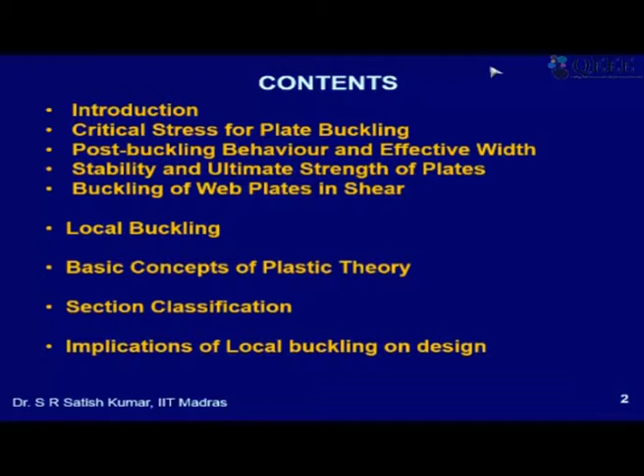This is a little advanced, but we just need to understand the concept of what plate buckling is. We don't need to go into the mathematics of it.

What I'm going to show is a plate subjected to uniform compression of nx per unit width. The width of the plate is B, and the depth or length of the plate is A. We've marked the x and y axis. The x axis is along the length, the y axis is along the width, and the z axis is out of the plane of the plate.

We are only pressing the plate, and as a consequence the plate is going to buckle out of its plane, so the deformations will be in the z direction. This plate is assumed to be simply supported along all four edges, meaning those edges cannot move out of their position, but they will allow rotation like a normal hinge in a beam. So it's only a two-dimensional concept, something like a beam.

We are now going to apply this axial load in the plate, which we call an in-plane load when it comes to a plate. As a consequence, as I go on increasing the axial load, the middle strip, strip AB, will start buckling, and basically the strip will try to come out of the plane of the plate.

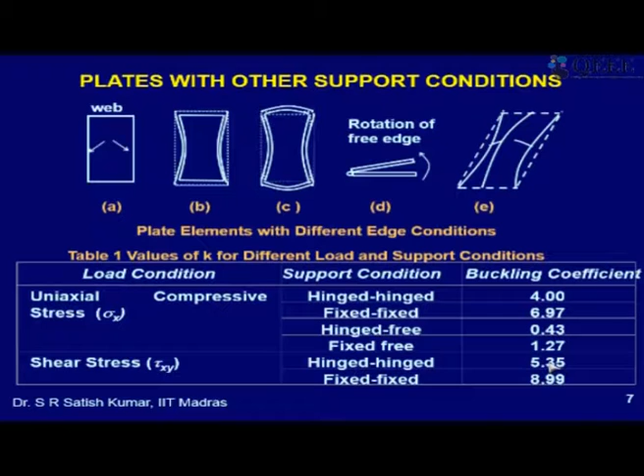Similar analysis can be done for shear buckling of plate also. These are the shear buckling coefficients. We'll see how shear buckling looks later on, but let's proceed and see what is the consequence of this plate buckling now.

In the design of plate elements, because most cross sections are made up of plated elements, we have something called the limiting width to thickness ratio. We don't want the plate to buckle within the elastic limit. As I compress, we want the plate to reach the yield stress first, and then once it reaches yield stress, if it buckles, that's okay. So we don't want elastic buckling of the plate.

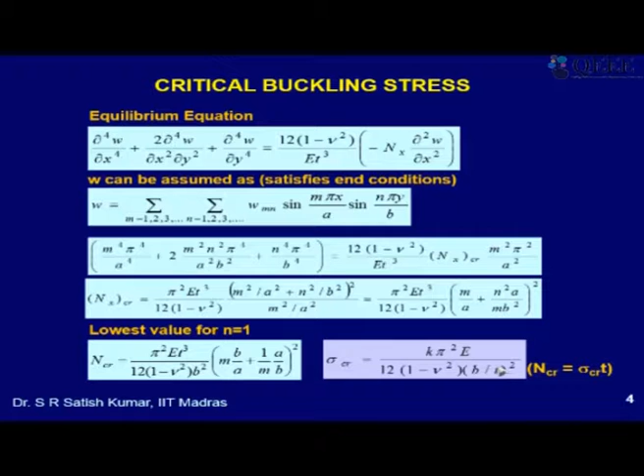So what we are doing is equating the buckling stress we got, F critical, and saying that this should be greater than or equal to Fy. That means if it is equal, we get the largest B by T that we can allow. These are the limiting B by T ratios which we calculate by equating F critical to Fy, and then Fy comes into picture.

We get the limiting B by T value as the square root of K pi squared E divided by 12 into 1 minus nu squared Fy. For any grade of steel, Young's modulus and Poisson's ratio are generally constant, so we can substitute these numbers, and pi squared is also constant. For a given support condition, say hinged, if I take K as 4, this entire thing becomes a constant, so I can write this as C by root Fy. Many codes prescribe the B by T limiting values as C by root Fy.

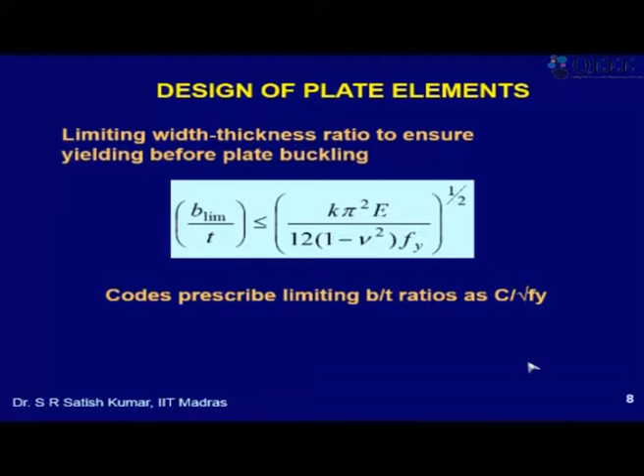What our code is doing is substituting Fy also as 250, so this entire thing becomes a number: C divided by root of 250, whatever that number is. It gives you directly that number and says use this for your steel plates. If your plate is made of some other strength of steel, you have a correction factor called epsilon, which we can use to correct this limiting value. That is as far as the buckling stress is concerned.

Now, as I said, the plate buckling is stable. So even though the plate has buckled, it can continue to take additional load.

So now we are actually interested to know what is the load, or what is the stress, at which this plate will eventually fail. Fail in the sense it can't take any further load and it starts buckling in an unstable manner.

This was first studied by Von Karman, and he realized that as the middle strip buckles, this stress is the F critical. So it will not take any further stress, and as a consequence, only the middle strip has buckled, but the edge strips, the strips next to it, are still able to take load.

These two are my longitudinal edges and they are hinged. So they will not allow out of plane deformation, but they will allow in plane deformation. So as I go on increasing the stress until the edge stresses become equal to the yield stress, this plate can continue to take further load.

At that point my stress distribution is nonlinear, so it is difficult to calculate what would be the total load taken by the plate. So what Von Karman said was you can convert this nonlinear stress distribution into two equal rectangular distributions such that the area of these two is the same as the area under the total curve.

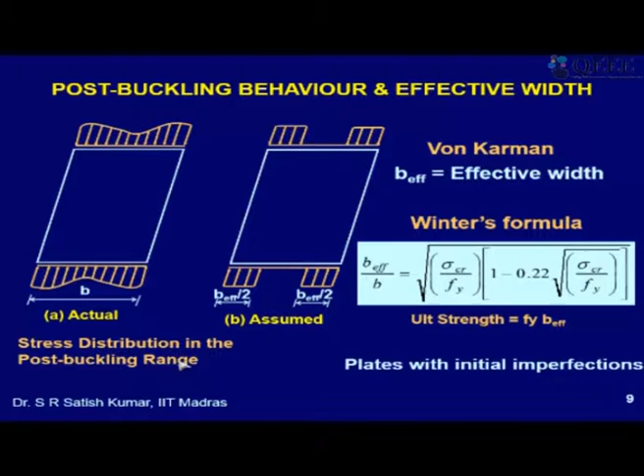But for hot rolled sections, we will limit ourselves to the buckling stress; we will not go for the post buckling stress. So now it helps us to understand plate buckling better if we compare it with column buckling. Let's look at how a column buckles.

We saw that an ideal column will go on taking axial load until P critical is reached, the Euler's critical load, and then suddenly it will buckle. So it will have a secondary path which is horizontal, an unstable buckling of a perfect ideal column.

But practical columns do have some imperfections, so they start buckling from the beginning, but they don't lose their stiffness so quickly. As I approach the critical buckling load, they lose their stiffness and go asymptotic to this curve. These are actual buckling curves for practical columns.

If you look at a plate, something similar happens for an ideal plate. It goes up until you reach F critical, but then instead of buckling suddenly, it continues to take further load, meaning it does have a positive stiffness. Of course the out of plane deformation will increase more and more, but in practical plates, you start with an initial imperfection and then it goes like this.

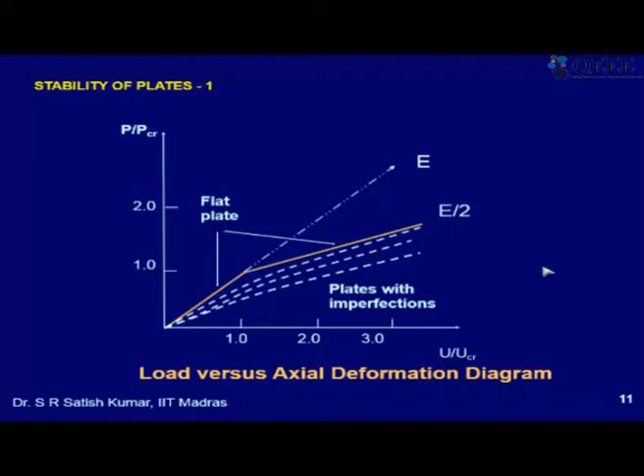So you don't have a well-defined buckling strength point, but the slope remains fairly steep, more or less. That is more important for us, so that is also used in design. Most of the plates which are very slender are used for design. This slide just gives us the stiffness values for a plate.

If you look at the test results for columns, we saw that Euler's curve plots like pi square E by L by R bracket square versus the slenderness ratio, and then F equal to Fy is the critical limiting value. Together they represent the column strength curve, and all the test results fall below that. Yesterday we saw that we use 4 column strength curves A, B, C, D depending on the type of column we are looking at.

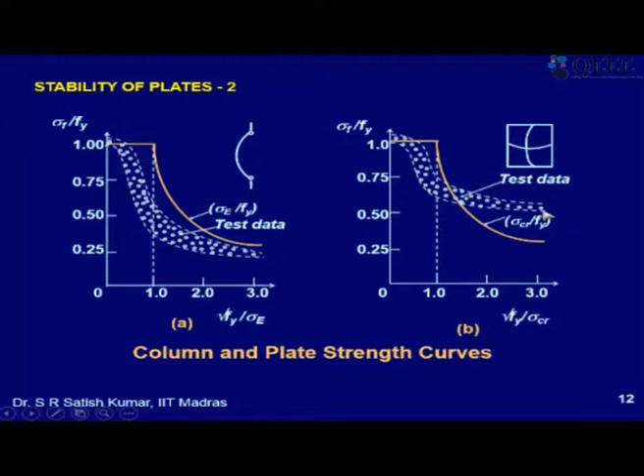In case of plates, the test results plot somewhat like this: as the plates become more and more slender, you get larger and larger post buckling strength. So this is my theoretical buckling stress value, but practical plates can have something called extra strength beyond the buckling, that is post buckling strength. Winter enables us to calculate that strength.

Now let's look at what happens when I take a plate and subject it to shear force, in plane shear. If I try to shear like this, normally the plate may rotate, so there has to be a complementary shear, otherwise the plate will rotate. For equilibrium you need to have complementary shear, and I am applying the shear V by the cross sectional area, which will be my tau critical.

As I apply this, if I plot it like a Mohr's circle for the principal stresses, I'll realize these two have a component along this diagonal, so they will compress this diagonal, whereas the other two have a tensile force in the other diagonal. Depending on the shape or aspect ratio of the plate, one diagonal will go in tension, the other in compression, and I go on increasing this tau critical.

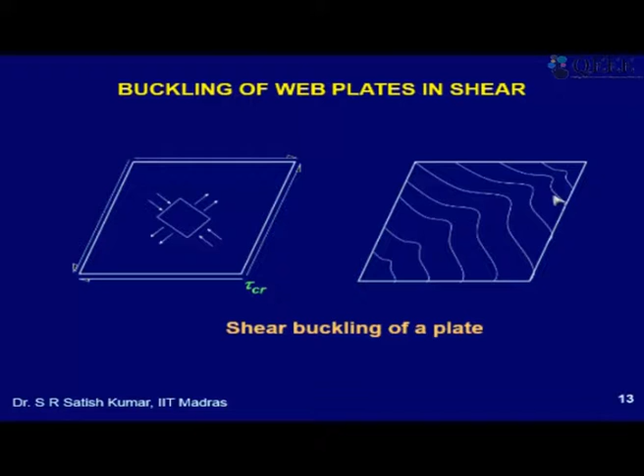What will happen is the diagonal in compression will buckle, as if the plate is oriented at 45 degrees, and this diagonal will buckle while the tensile diagonal continues to carry further load. So even shear buckling is stable, and we know the shear buckling coefficient for a plate, which is how we use this in design of plate girder webs. This is called tension field action, which adds up to the shear buckling strength.

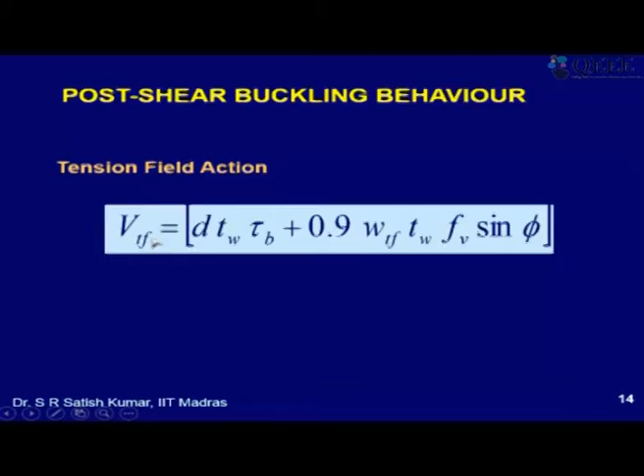The theoretical value of shear buckling stress is tau critical, but the practical value for imperfect plates is tau b. The code gives you how to calculate tau b from tau critical. So this would have been the buckling stress, but in addition to that we have another expression which adds the post buckling strength. Together they represent the total load at which the plate will fail in shear. That is just an introduction to plate buckling; we are not going to go deep into that.

Now we'll proceed to how plate buckling affects our routine design. We have to look into what is called local buckling, and how that affects design, and to tackle that we have developed a method called section classification.

We know that most of the steel sections we use are not like single plates, but are actually made up of plates. For example, an I section is made up of 3 plates, a box section is made up of 4 plates, and so on. But what is important from the plate buckling theory point of view is the end conditions.

This plate, even though physically a single plate, can be looked at as made up of 2 plates. Both plates actually have a hinge condition at the web, and one edge free. So one edge is hinged, one edge is free — these are called outstands. The I section has 1, 2, 3, 4 outstanding elements and one internal element which has both edges hinged.

As I compress this I-section, what is likely to happen depends on the B by T or D by T ratio of the plate. For the flange width to thickness ratio, I should use buckling coefficient K as 0.43, and for buckling of the web, I should use K as 4.

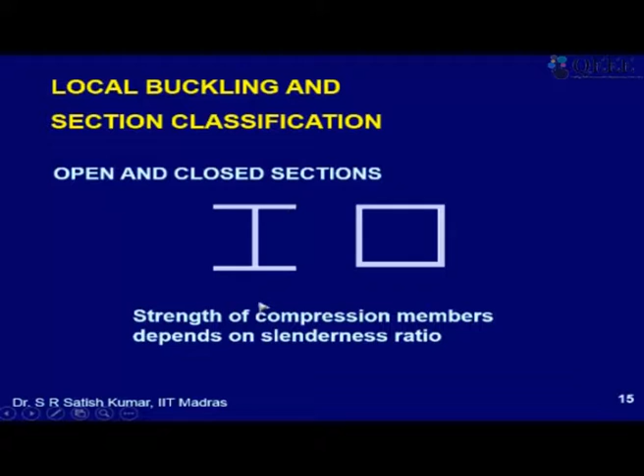This is called local buckling. Basically local buckling gives distortion of the cross section, but the axis of the member remains straight. If the axis bends, that's called global buckling. Here we are saying the axis is straight, the member has not buckled as a whole, but only the component plates have buckled. This is called local buckling.

We don't want this to happen in real columns. Even though local buckling is stable, we don't want this happening in hot rolled columns. So we have to calculate - either we limit the B by T values, saying the flange B by T value cannot go beyond a certain value, or we allow it and ask the designer to make sure at what load it will buckle, and what will be the consequence of that buckling on design. Either way can be done.

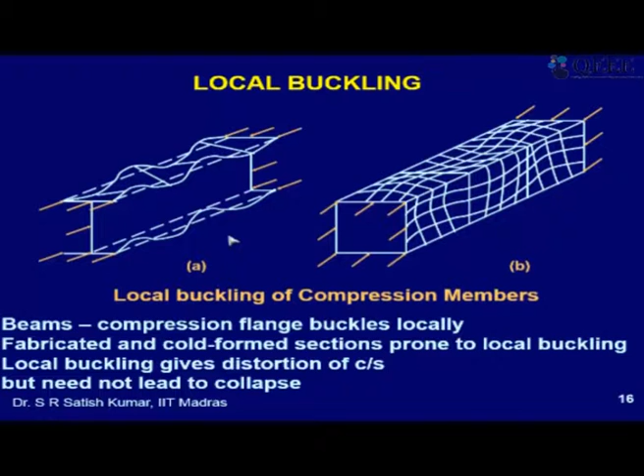So what we are saying is we need to be aware of local buckling, and then we need to be able to take it into account in the design of compression members and members under bending. So the first thing we'll do is what is called section classification.

Before we go for that, let's look at some basic concepts of plastic analysis. As I was telling you yesterday, in limit state design, elastic analysis assumes the first yield anywhere in the beam as the collapse point, and doesn't go beyond that. Whereas plastic analysis helps you analyze the progressive failure of the beam until it collapses, and gives you the correct collapse load, so you know exactly what factor of safety you have.

Let's take a fixed beam - it's an indeterminate structure. We apply a UDL W per meter run, shown as a thick line here, and go on increasing the uniformly distributed load. Initially my bending moment diagram will be like this - hogging at the supports, and sagging at the midspan. As I go on increasing this, at this cross section, the bending moment will reach the first yield moment My, and it will start yielding.

Plastification across the cross section will occur as shown here. So this stress will reach Fy, and then it cannot take any further stress, so it will remain at Fy, whereas the inner fibers will start reaching yield until the entire cross section has reached yield stress, plus or minus. So that is yielding in compression and yielding in tension. In that situation the beam can take a moment called MP, the full plastic moment or the plastic moment of the cross section. It will reach that, and after this it cannot take any further bending moment because it has reached its full plastic moment.

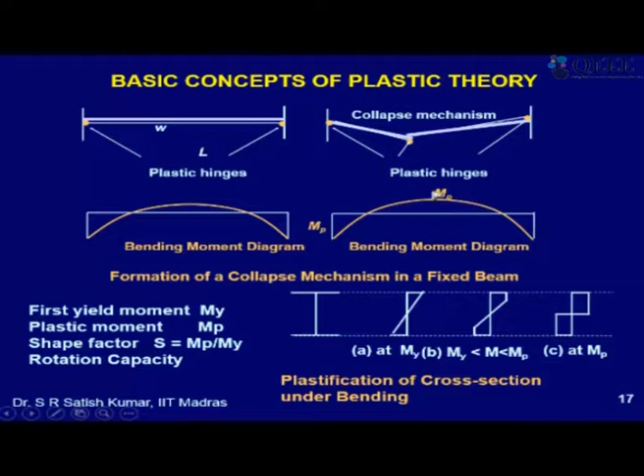So again, plastic analysis is not valid. Such sections are called compact sections, and they do reach MP, but they don't maintain MP for larger rotations. If I further increase the B/T, there will be sections which cross My, reach first yield, but can't even reach MP. So you can only do elastic analysis. Your pure bending theory, like M/I equal to F/Y, can be used to calculate My, and after that we don't know whether it will buckle here or here.

It is not possible to calculate, so conservatively we will take the capacity as My, and then it will come down. As I further go beyond that B/T limit, which I told you in one of the slides, the section may buckle even in the elastic limit. That is, even before the stress reaches Fy, the section will buckle, which means even our normal pure bending theory is not applicable for such sections, unless we calculate the effective width and take only that part as effective. These are called slender sections.

So the code says you are not allowed to use slender sections because your analysis is not valid for that. But you can use semi-compact sections in bending, so you will reach My. You take the capacity of semi-compact sections as My, and for compact and plastic you can take the capacity as MP, but you can't do a plastic analysis. You can do an elastic analysis and use a compact section, but you can't do a plastic analysis unless the section is plastic. This is called section classification.

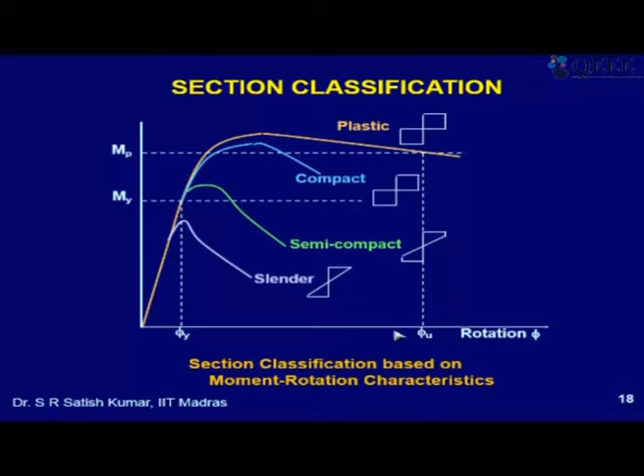Now of course we can't always sit and draw the moment rotation curve for practical sections. So what is the easier way to classify sections? We realize that there are limits on b by t in the middle also. This b by t is the limit which differentiates between elastic local buckling and plastic local buckling, and this limit says that there is a high rotation capacity of such sections. So there are limits called beta 1, beta 2, beta 3 on the b by t values, which enable us to classify just by calculating b by t ratios.

If my b by t ratio is less than beta 1, we say it's plastic. If it's between beta 1 and beta 2, we say it's compact. For both plastic and compact, my moment capacity is MP. After beta 2, it will actually come down like this, but since I don't have a means of calculating this, I conservatively assume my capacity as My for semi-compact sections. For slender sections, again, I don't have any way of calculating this, so I'll say that I'll not use slender sections, or I'll take the moment capacity as 0, conservatively. That means I won't be able to use that section for bending.

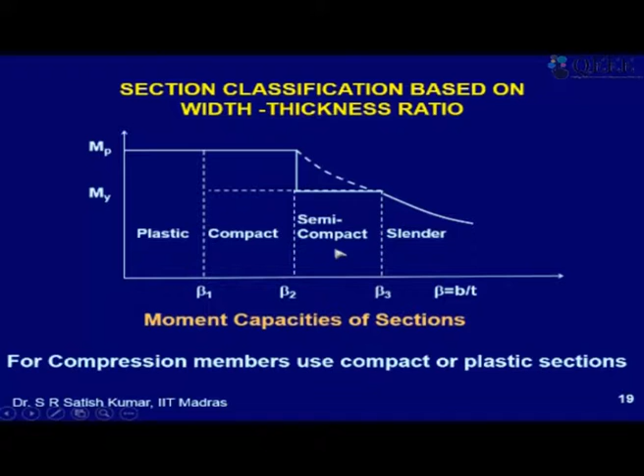For compression members, we don't have this type of classification because we are not drawing the moment rotation curve. So we will say that they should at least be semi-compact. These limits are given in table 2 of the code, right in the beginning of the code, as width to thickness ratio limits on plate elements.

Let's say your member, a column, is under axial compression. We come to this: if it is a flange, we use this; if it is a web, we use this. And if it is rolled or welded, we use the corresponding limits.

If I want to design a column as a rolled section, I take the outstanding element of the I-section flange as rolled and apply these limits. For the web, assuming there's no neutral axis shift under pure compression, those limits aren't applicable, so I just make sure the d by t of the web is less than 42.

These are the numbers given in the code - the beta1, beta2, beta3 values given for 250 MPa steel. There's a correction factor for grade of steel: if Fy is 250, epsilon is 1, so I check directly with this number. If Fy is 350, epsilon becomes about 0.85, so I multiply this by 0.85. This may reduce further, and so on.

Why are so many numbers required? It's because we have different elements and the imperfections are also different. For example, if it's an outstanding element, one edge is hinged and one edge is free to locally buckle. If it's a rolled section, we use 9.4, 10.5, and 15.7 as the B by T limits for the respective sections.

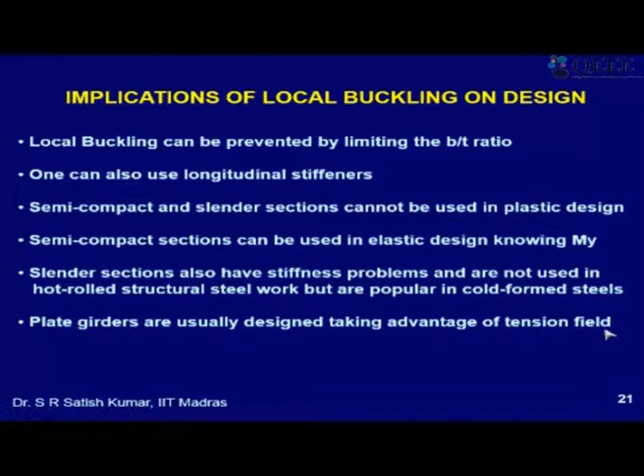Plate girders are usually designed taking advantage of the post-buckling strength, which is called tension field action. I think I've reached the end - I'll stop here. We'll take some questions on local buckling and section classification.

The idea here was just to have a physical understanding of why these B by T limits are given, and what the consequence is on the design. We'll take this further to see how the code helps us design sections for bending or compression based on local buckling.

It's open for questions. My question is regarding that table where B by T ratios are given - although you said for welded and rolled parts... if you can open the table. Yeah, this is the table. Now in the second row, outstanding element of compression flange, there's a lot of difference between these limitations for rolled and welded parts. Correct. If it is rolled, and as you said, it's because of residual stresses. Correct, yeah.

We know that there will be some amount of residual stresses in rolled sections as well. Yes, correct—those have been factored in when arriving at these numbers.

So regarding the difference in limits between rolled and welded sections—apart from residual stress, is there any other reason? No, there's no other reason. When you weld a section, you create much more residual stresses, and as a consequence the plate buckling gets affected. That's why, as we saw yesterday, columns with welded sections have a lower strength curve compared to rolled sections. Besides residual stresses, there may also be what is called weld distortion, and that has also been included in these numbers.

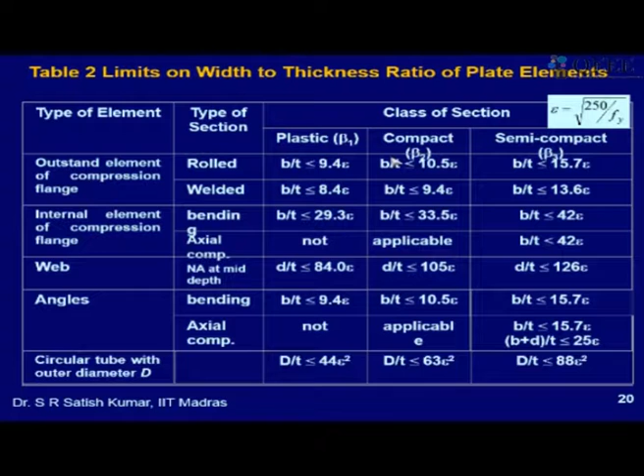So there's no role of rigidity of the joint—no role of the flange-web junction rigidity. It is assumed that it is fully, adequately rigid. The residual stresses are the only reason. Correct. Thank you.

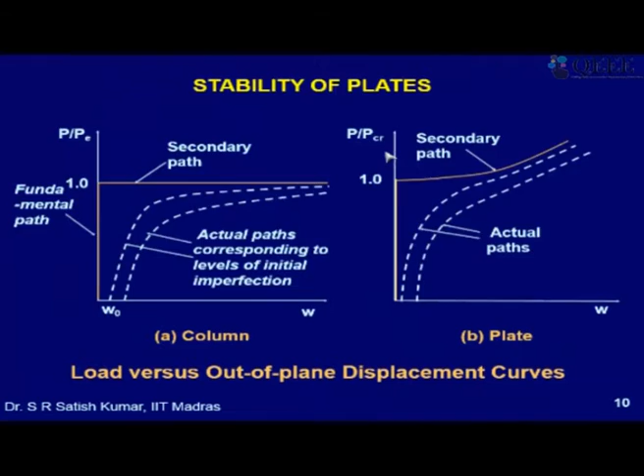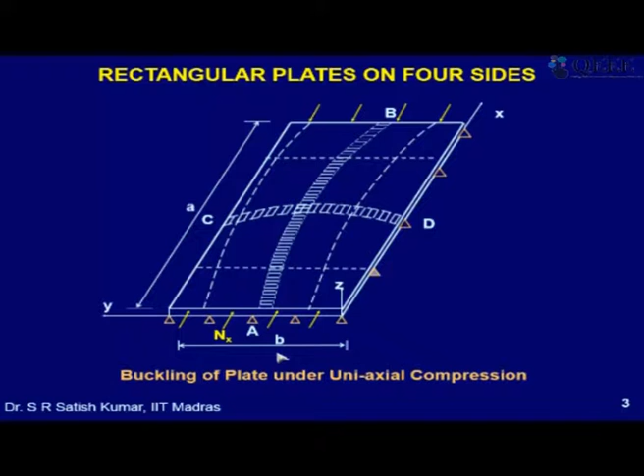What is the aspect ratio, sir? Aspect ratio is the length to width ratio of the plate. In this derivation, we called it the aspect ratio, but in reality our plates and sections are very long. So what happens is we try to take that aspect ratio as more or less 1, because for 1 we get the minimum buckling strength.

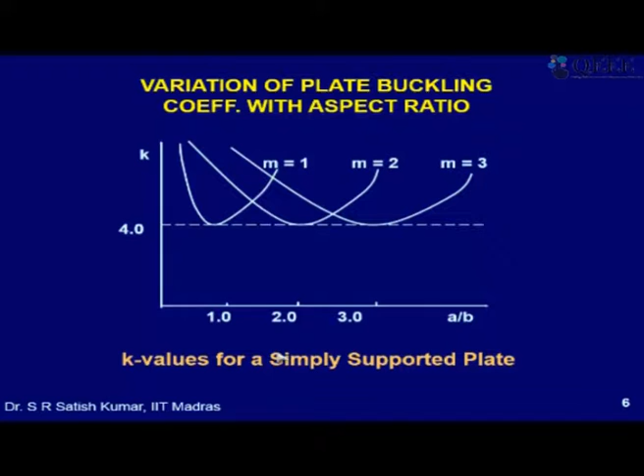Next we proceed to the second presentation, design of beams, covered in Section 8 of the code. Section 8.1 gives some general remarks, and 8.2 talks about design strength of a beam. So now we want to know, if we take some I-section, say ISMB 300 or some welded section, how to calculate the strength of this section in bending—that is covered in the code, and we will come to this afterwards.

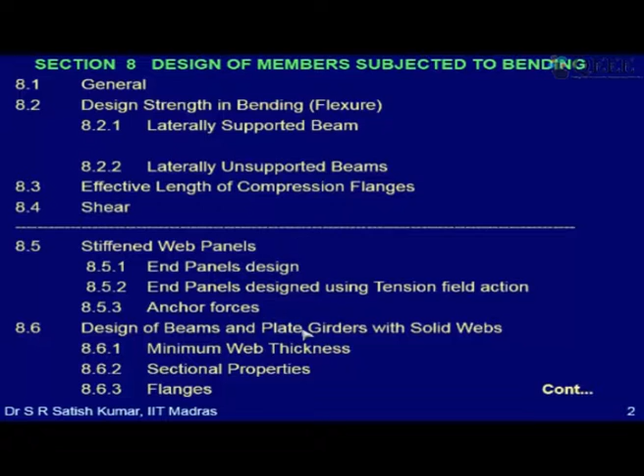Before that, let's look at what happens when we apply a load on a beam. Normally what you might have studied is that beams resist loads predominantly by bending moments and shear forces—two kinds of effects: one creates bending moment, the other creates shear force. But in reality, the flow of load or stress is pretty complex.

If I take a simply supported beam and apply a point load, this flow will go like a parabolic arch—there's a compressive stress trajectory by which the load goes into the supports, and also a tensile stress trajectory like a cable. So it's as if the beam acts as an arch plus a cable stuck together, and that's how it actually transfers the load. As a consequence, other forces come in—at the support the web gets compressed, there's stress concentration—so there are a variety of failure modes in beams.

But the major failure mode to understand first is that as I bend the beam, the section above the neutral axis is essentially under compression—like a T-section. As I bend it this way, the upper part under compression behaves similar to a column, so it will suddenly buckle out of plane. The tension part will not buckle; the lower part remains straight, but the upper part goes out of plane—that is called lateral buckling of the beam.

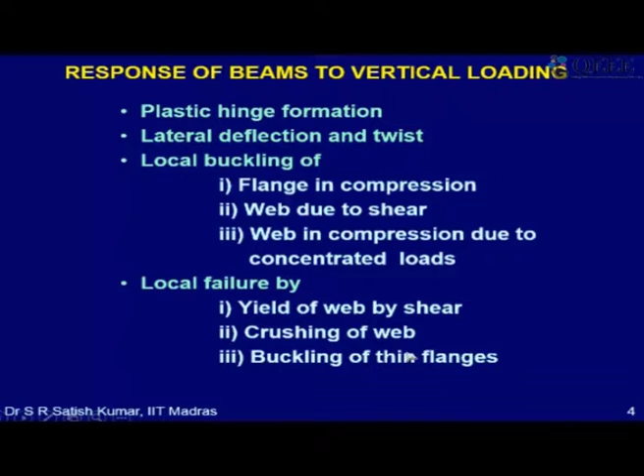Then there are local failure modes like yielding of the web in shear - actually the web yields in shear, and the crushing of the web can occur and so on. And then buckling of thin flanges. So these are possible failure modes.

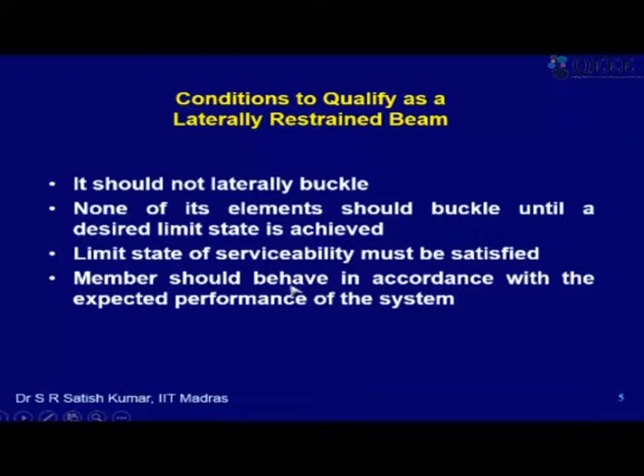So first let's look at when a beam is going to reach its plastic moment capacity. It should not laterally buckle. None of its elements should buckle locally or whatever until the desired MP is reached, the plastic moment capacity is reached, and limit state of serviceability, of course, a deflection check will satisfy separately, and members should behave as per the analysis that we have adopted.

Okay, so basically we classify beams as laterally supported beams, that is where the lateral buckling will not occur, and laterally unsupported beams where lateral buckling can occur. Okay, so now we are going to go back and see, first let's look at laterally supported beams.

As I said, they will go on bending, and then the extreme fibers will reach Fy, and then as we further bend, the subsequent fibers will yield, and the cross section will reach MP. So the first thing you should know is how to calculate MP for a given cross section.

Now at this point the only equation that we have is the equilibrium equation, that is the stress resultant on the compression side should be equal to the stress resultant on the tension side, or C should be equal to T. Now C or T is given by, let's say if my width is B and depth is D, so basically half of this cross section, that is 0.5 BD, is in compression and the other half is in tension. So the area of cross section which is in compression into Fy or sigma y gives me the C value. So T is also same.

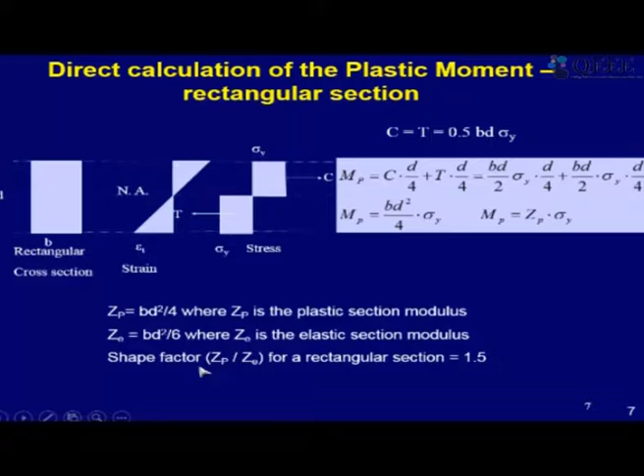Now let's see what happens when I go for an I section. If I take an I section, it is convenient to break this into equivalent rectangles: the top flange, half the web, the bottom flange, and half the lower part of the web, into 4 rectangles. I calculate C1, C2, T3, T4, etc., and then take their moments about the neutral axis to get MP. C1 into its lever arm gives MP1, C2 into its lever arm gives MP2, T3 into its lever arm gives MP3, and T4 into its lever arm gives MP4. Like that we calculate the total MP.

What will be C1? It is basically area, that is B into T. Here I am calling the width of the flange as B, thickness of the flange as T, into Fy gives me the C1 force, acting at a distance from the neutral axis. The total distance is D by 2 minus T by 2, so my lever arm is D by 2 minus T by 2, giving MP1. Similarly I can calculate MP2, MP3 and MP4, and if I add them all up, I get the total MP of the cross section.

Once I get that, comparing MP as ZP into Fy with ZE into Fy, I find that ZP by ZE comes to roughly around 1.1 to 1.15 maximum in some very thick web members. So it's like 10 to 15% more, 1.1 to 1.15. It's not very much compared to the rectangle, where we had 50% more, but here we get a much lesser value.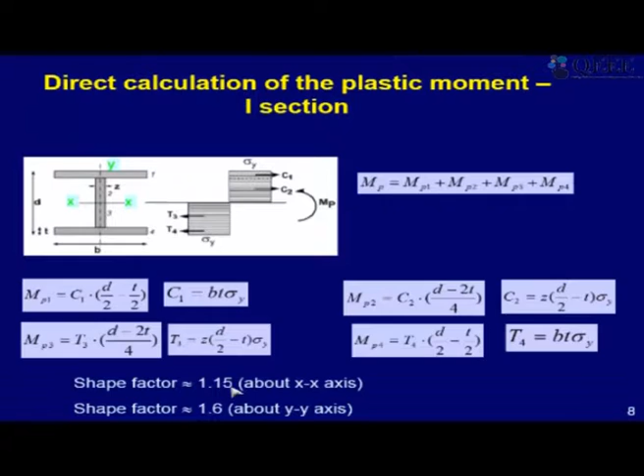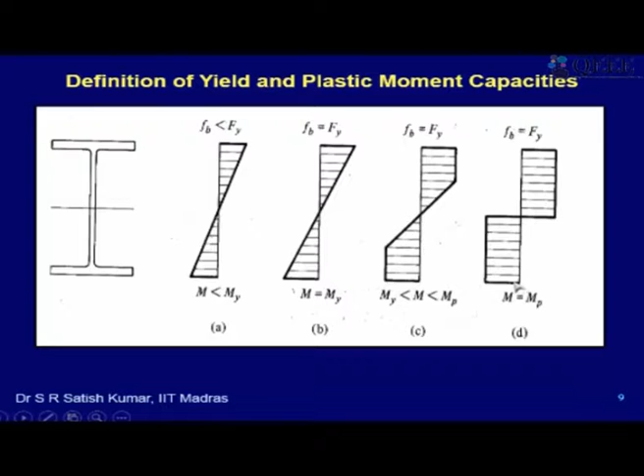Let's go further and see this is what actually happens: gradual plastification across the cross section. We have seen this yesterday also. Let's now see what the code says about calculating the moment capacity of various beam sections.

As usual, the limit state equation says that the factored bending moment, denoted as M — that is the working load bending moment multiplied by the load factor, giving the design factored bending moment — should be less than the design strength of the section, denoted as MD. So for a laterally supported beam, there is no issue with lateral buckling or anything; it is going to reach MP.

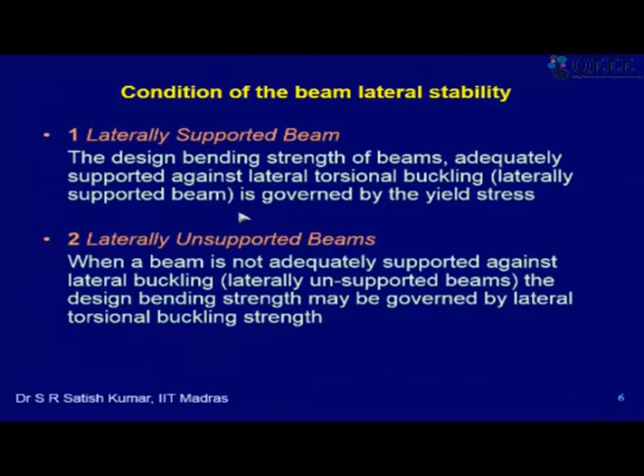So that is what we are looking at. So the code, as I pointed out, if we go back into section classification, we know that if it is a plastic section or a compact section, my beam can go on bending until it reaches MP. So my plastic capacity should be, MP should be ZP into Fy.

This is my MP. And since Fy has an uncertainty, my design capacity, the minute I put D, I should put gamma M naught. So MP will be ZP Fy, but MD will be MP by gamma M naught.

So this will be my plastic design capacity. Instead of writing like this for plastic and compact, if I go for a semi-compact section, it is going to be, I can't reach MP, so it has to be MY. So ZE into Fy will be my MY, and M design will be ZE into Fy by gamma M naught. So it will be like this.

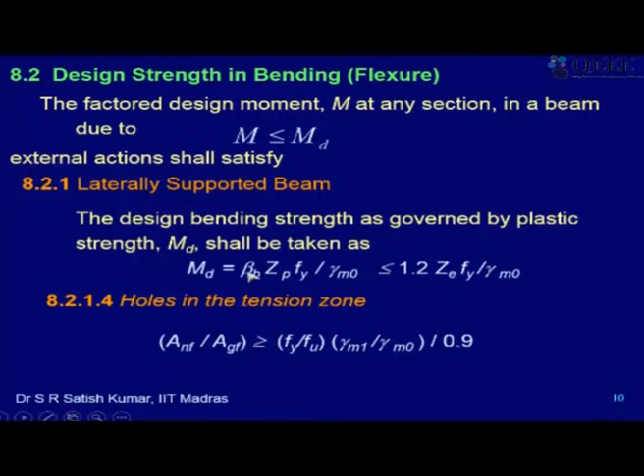So instead of writing that, the code has used a factor beta, and what it says is, for plastic and compact sections, you take beta as 1. So that means MD will be MP by gamma M naught. And for semi-compact sections, it says that you take beta B as ZE by ZP. So I'll substitute this here.

What will happen is this ZP will get cancelled. So MD will come out as ZE Fy by gamma M naught, which is nothing but MY by gamma M naught. So that is how we get the capacities, and it says that whatever may be your section, you can't exceed a shape factor of 1.2.

So don't go beyond 1.2. This is because there is some issue with shear and bending interaction which comes in, so we may not exactly be able to reach MP for a rectangular section, because of presence of shear force. So there's an upper limit, but this will rarely govern for any of the sections that you will ever use. So you don't have to always check this. You just do this correctly and you will get your design bending capacity.

So if you have to design a beam, you calculate the bending moment, you choose a section, check its MD. If MD is greater than M, your design is okay. Otherwise, you take a higher section and design. If MD is very, very large compared to M, then you take a slightly lower section and make sure that you also get an economical solution. So it should be economical and safe.

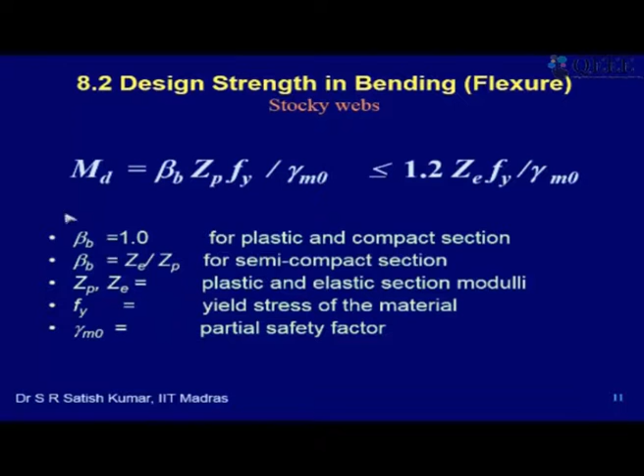So that is about what is called laterally supported beams. Now laterally unsupported beams, if you take, let's say, an I-section cantilever, you apply a vertical load at the tip, so you will get a triangular bending moment. The maximum bending is at the support. So you will think that you will go on increasing the load until this bending moment becomes MP. But in reality, that is not the case. The beam may buckle much earlier than what you are expecting.

So you have to now understand that even the normal plastic analysis will not be valid, or the stress analysis itself is not valid. We have to do a buckling analysis. Just as you took a column, went on putting axial load, your P by A was your stress, and your stress had not reached Fy, but before that it reached F critical, so it buckled. So here also beams can buckle at loads much below their moment capacities for corresponding supported beams, and this is how you have a problem. So to take care of this, we have to understand how to do a buckling analysis and bring that value into the design.

So the lateral torsional buckling of symmetric sections is quite similar to what we do for Euler's buckling of a column. The same assumptions which Euler made, that the column is perfectly straight, here we have written it as the beam is undistorted. So that means my beam is perfectly straight in plan, that is, when I look from above, it is perfectly straight.

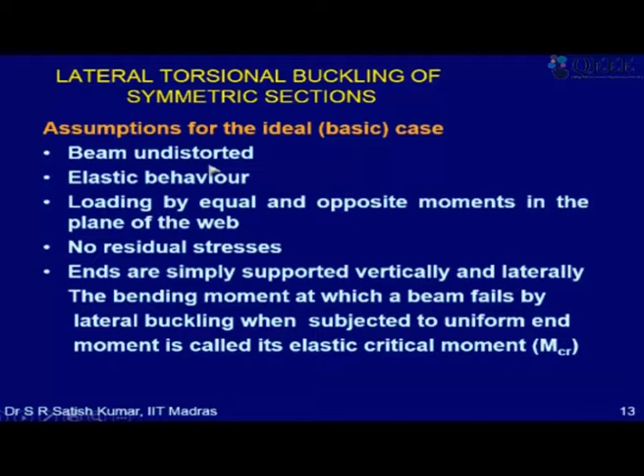So if the beam is simply supported in plan and it's loaded along the center line of the web, with equal end moments, and it has elastic behavior and is undistorted, then we can set up a differential equation like what we did for columns, the Euler's equation we derived. So something similar we can derive.

So the critical moment will be a sum of two resistances. Let's go back and see why, or what happens exactly.

So what I'm going to do is apply equal end moments, that is, I'm going to bend about the XX axis in this case, or ZZ axis as per the code, the major axis. As a consequence, the beam will of course deflect downwards because of bending, the bending moment. And then it is buckling laterally, so it is deflecting laterally. So the cross section has come out from that original plane in which it was there.

So if this is my web, it is going to deflect laterally like this. And then it has also twisted a little bit, right? So why has it twisted?

Because something unique is happening: as I said, the top part of the beam above the neutral axis is in compression, and that is the one which wants to laterally buckle. The bottom part of the beam is in tension, so it doesn't want to laterally buckle. So the top flange is pulling the beam out of its plane, but the bottom flange is trying to take it back in. As a consequence, your cross section will not only deflect, but it will rotate a little bit, so you have this theta also coming in.

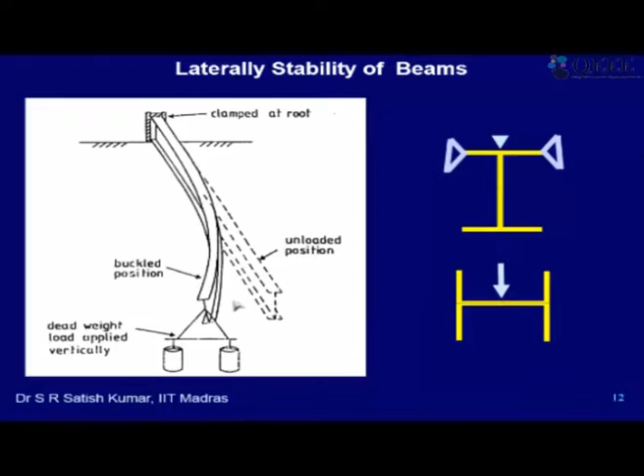You see that it has deflected downwards, it has deflected sideways, and the I section has rotated also. So this web is not really vertical, it has actually got tilted a little bit, right? So that is what is happening, and that is why we get torsional resistance.

Then one more resistance comes into picture, which is the warping resistance. So again, in I sections, there are two types of torsion. One is called Saint Venant torsion, or pure torsion, where like in pure bending we assume plane sections remain plane after bending, in torsion we assume that plane sections remain plane after twisting.

So we are twisting this, but the section remains plane. But when I twist an I section, what will happen is it will not remain plane, it will go like this: one point will come out, one point will go inside.

Okay, so that is called warping. So that resistance also comes into picture, and you get an equation which looks like this, where you have new terms called G, gamma and J and all that. G is anyway the shear modulus of elasticity.

So we have three terms: EI, GJ and E gamma, we can say, capital gamma. EIy is the flexural rigidity about the minor axis, so how easy it is to bend the beam about the minor axis - it will buckle also easily in the minor axis if that is easy to bend. Similarly GJ is the torsional rigidity, how easy it is to twist the beam, and E gamma is the warping rigidity.

So all these three terms come into picture, and the code gives you how to quickly calculate the value of J and gamma, etc. So we will be able to calculate MCR. We will go to the code equation later. For the time being, we just know that this is what has happened.

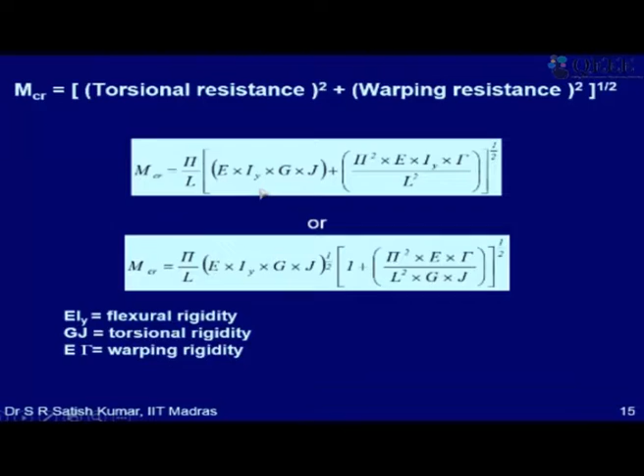Then there's the type of loading - we started with and derived this equation for M critical for a beam under uniform bending moment, that is at the two ends we have applied moment M. So we had a constant bending moment, but in reality beams don't have constant bending moment. You know that, for example, if you put a UDL, you get a parabolic bending moment - a large bending moment in the middle, but it becomes zero at the support.

But that may not have much effect because the middle is where the lateral buckling occurs, so there you have a large bending moment. But there may be beams where you have large bending moments at the supports, but not so much at midspan. So that type of bending moment, or the way you are putting the loads on the beam, matters. This is also called a moment gradient.

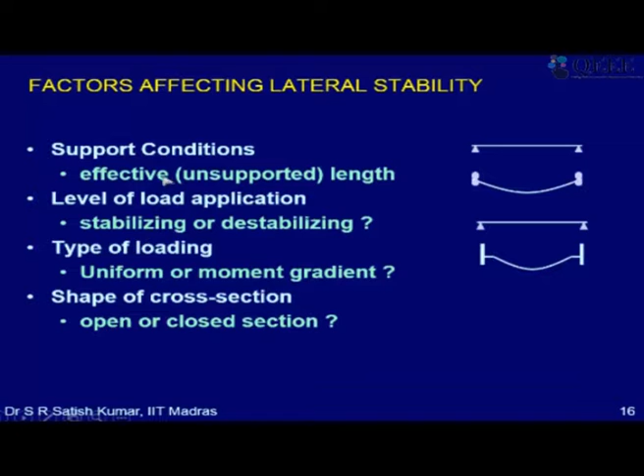And as we saw, if the section is a closed section like a tubular, rectangular or square tube, then it is very rigid for torsion. Whereas if it is an open section like an I section or channel section, then it is easy to twist. So that also matters. All these factors matter, and somehow we need to account for this in our design calculations. Suppose we do all that - we can get a curve similar to the column strength curve.

We said ideal columns will behave as per the elastic buckling curve, which will go like this. Practical columns can't take stress more than yield stress, so there is a limit.

Similarly, an ideal beam can buckle as per the equation we derived for M critical, which will plot like this based on the effective length. For practical beams, the moment cannot go beyond MP in any case, it can't go to infinity as L tends to 0, so we put a flat line. But for realistic, practical beams, we also know that between this line and that line there is a transition curve, which is for inelastic lateral buckling.

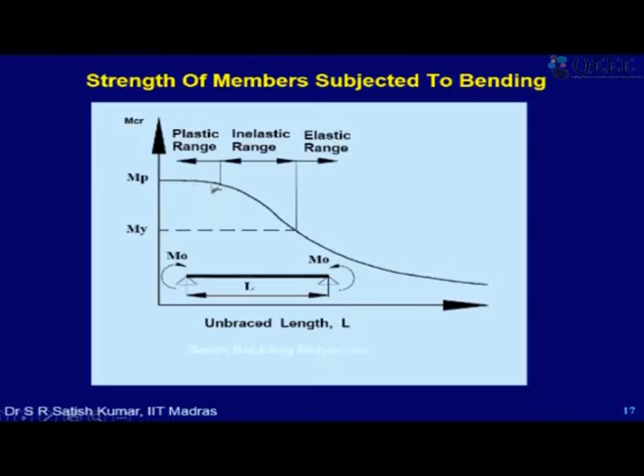Just as we have in columns, we have a curve which is quite similar to the column strength curve, and we will derive the equation for this and use it for design as a beam strength curve. So this is what we are doing.

This is comparing our beam buckling with column buckling. In a column, we applied an axial load P and it buckled laterally like this, the section literally moved in the lateral direction. In a beam it is something similar, it moves, but then it also rotates. Instead of axial load, here we are applying bending moment because beams are subjected to bending. Just as we took care of different end conditions with effective length for columns, here also for different end conditions as well as variation of bending moment, we'll take care by varying the effective length accordingly.

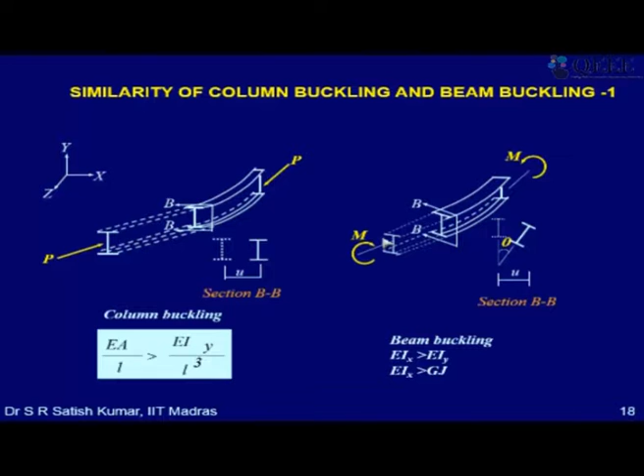So the equation given in the code as bending strength for a laterally unsupported beam is quite similar to what we use for columns. Basically we call it the design bending stress. You read this as MD equals design bending stress into ZP into beta B. If it's a semi-compact section, beta B will be taken as ZE by ZP, or if it is a compact and plastic section, it will be taken as 1.

The design bending stress itself is obtained as chi LT into Fy by gamma m naught, just as we did for a column, where FCD was something similar. The only difference is the chi here we differentiate by putting LT, which stands for lateral torsional buckling. The chi LT is given by exactly the same type of formula which we use for column buckling or the column strength curve, where we used something called an imperfection factor.

In this case, there are only 2 curves given because it's so complex that we can't consider all the possibilities, so we conservatively make it simple. We use only 2 alpha LT values, one for rolled sections and one for welded sections. So there will be 2 curves like A and B, for example, like the column strength curves, which will be used for design.

If you put that alpha, you get phi. Put phi and lambda, you get chi, and from chi you can get FBD, and from that you get the moment capacity. That is how the code says we need to design. I'm not showing the 2 curves because they're quite similar to the column strength curves. So that is the formula for lateral torsional buckling.

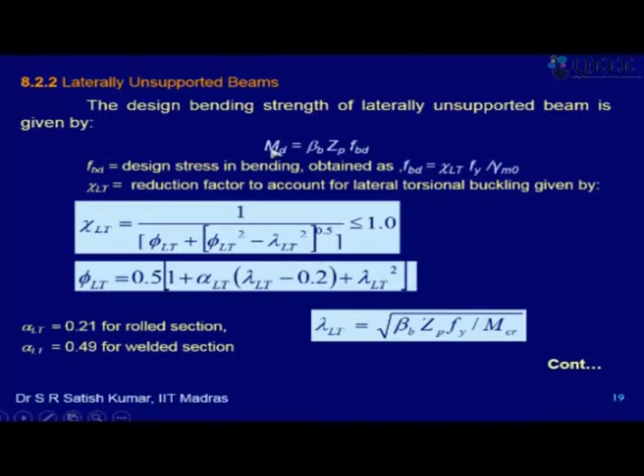Again, from the theoretical value, we convert that using this lambda. So MCR will come here, and as a consequence of this lambda, it will become FBD rather than FCR, and that will take care of this. Alpha will bring in the imperfections, the residual stresses, everything into the picture here, and we get a strength which is matching with the practical test results for real beams.

So that is basically about lateral buckling of the beam. Now I would try and avoid lateral buckling if possible in many beams. So how do I do that?

You can provide what is called discrete bracing. Remember that if two beams are going to laterally buckle, just connecting them with another piece in the middle is not going to help prevent lateral buckling, because they will both move together and this piece will also move as a rigid body. But if I put cross bracing in plan, I will be able to support some of the intermediate points, prevent them from moving out of the line of the beam, and avoid lateral buckling. So those are called discrete bracing.

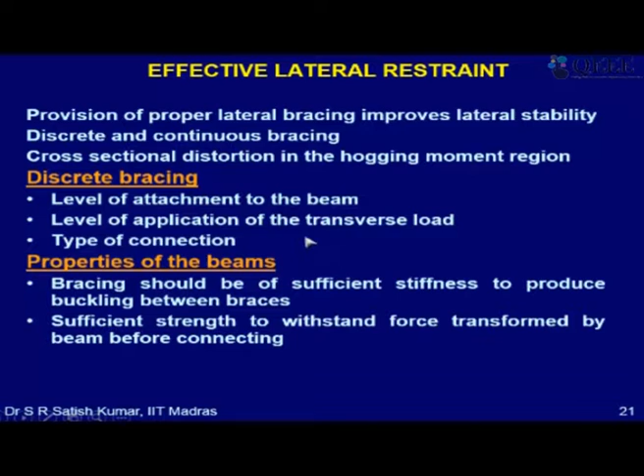Or I can give a continuous support to the top flange in the form of a slab or something, so it doesn't allow this beam to laterally buckle. So discrete or continuous bracing is possible, and the level of attachment of the bracing should be the level of the compression flange - that is where it will be most effective. If you brace the tension flange, that is not going to help in any way, because it's the compression flange which is going to buckle, and you are bracing the tension flange. It may help a little bit, but it will not be very effective. So those are the points which we should understand to avoid lateral buckling.

Other failure modes are like beams also transmit shear. So if the shear force exceeds the capacity of the web, then the web may yield in shear, as shown in this figure. That is covered in section 8.4 of the code. And then there could be, as I said, buckling of the web and crippling, also called crushing of the web.

So buckling of the web - if this is my web and this is the flange, suppose I apply a point load, this web will buckle between the flanges. So this is how the web is going to buckle. We need to calculate that at points where we have concentrated loads. And crippling of the web is when you apply a load and, only due to stress concentration, only a local part of the web will crush. So that is called crippling of the web.

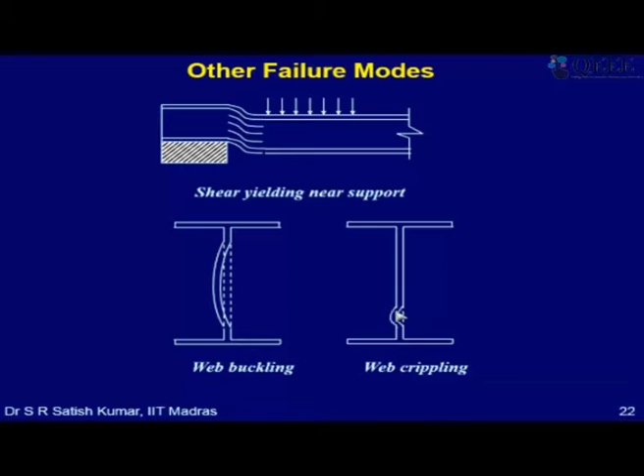So we'll just look at these two and then see how to calculate this. The first is web buckling. What we are saying is, if any beam, even though you don't have a point load, there will be a reaction at the support. So this is my beam, simply supported at this end over a certain distance - this is called a stiff bearing length. My reaction is applied over a short support length, which is called a stiff bearing length. And as a consequence, this web of the beam is buckling.

So now I want to make sure this should not happen. I need to calculate at what load this web will buckle. The code says you assume that this load will get dispersed by the time you come to the middle of the depth of the web where the buckling is occurring. This will get dispersed at 45 degrees. So I'll have a cross section which is B1 plus N1 in one dimension, and the other dimension is the thickness of the web. So this, like a plate, is going to buckle now, as a web.

We will look at it exactly as a column. So if this is my B1 plus N1, and this is my thickness T, this is going to buckle like a column. So how do I calculate? For that B1 plus N1 T section, I calculate the Ry, I calculate lambda, and corresponding to lambda, I'll go to section 7 of the code about columns, calculate the FCD value, and FCD into area of cross section gives me the web buckling strength, called PWB.

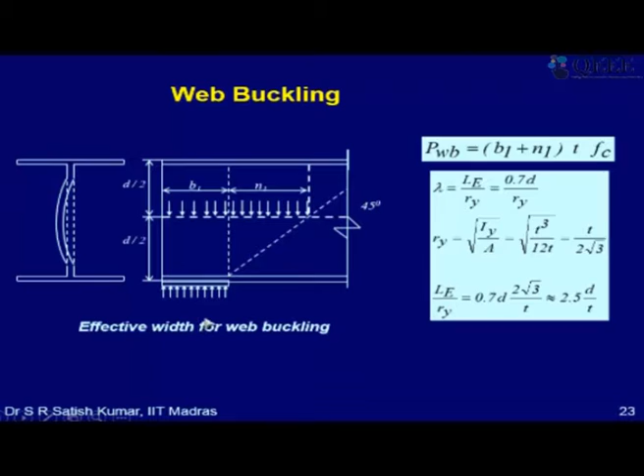Then web crippling, as I said, occurs due to local stress concentration effects. If I apply a variety of loads on the beam, all these loads will eventually have to flow into the support. So at the support location there could be stress concentration. This is when I'm assuming that the beam is just kept on the support like this. So we get all the forces coming and entering on the support, and of course you have a flange at the bottom, so the flange helps at this point where the reaction comes.

So at the support you have a wide flange and all the forces are applied there, but eventually those forces have to enter into the web. So all these loads that you see on the section have to eventually enter into the thin web, and the web will have a stress concentration problem.

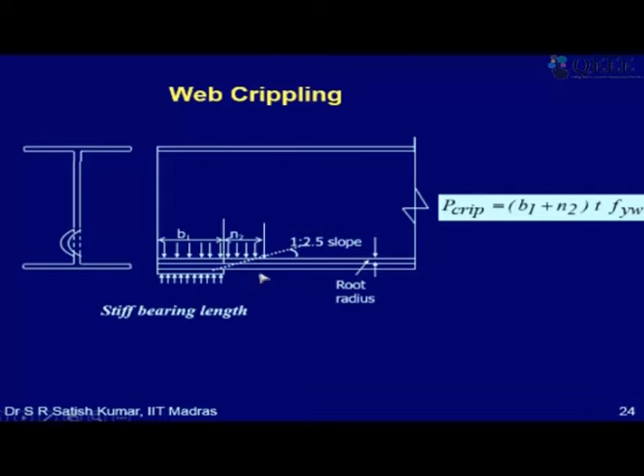So these are two checks which we need to do as per the code, and shear is taken as Fy by √3 gamma m0, the stress in shear into the area of the web. So we assume that the entire shear is carried by the web. Fy by √3 gamma m0 into depth of web into thickness of web will give me the shear capacity to prevent shear yielding of the web.

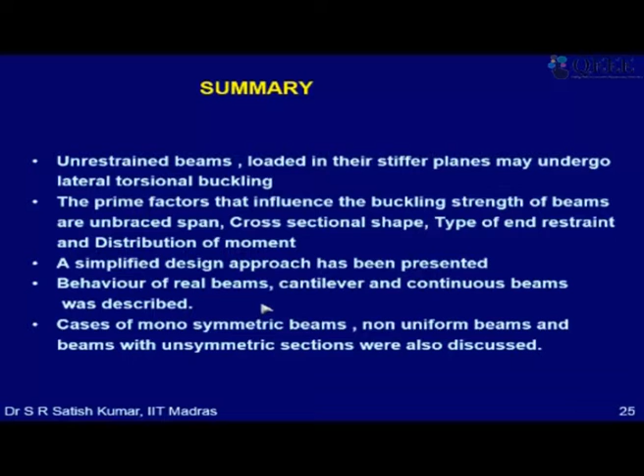That way, even in a simply supported beam, I need to make sure I clear the bending check, then the shear check, then web buckling check, web crippling check, and the deflection check. Then only my design gets complete for one beam. So this is the summary.

We can have questions on beams now. Ramanjanelu has asked two questions. One is, what is meant by actual shear path and complementary shear?

Complementary shear, as I said, if you apply shear in one direction, like vertical shear, then there has to be a complementary shear, because this is giving, let's say, clockwise rotation in one direction.

So there has to be a complementary shear which will give rotation in the other direction. And actual path is basically the path in which the load deformation curve goes. Maybe you are confusing clubbing that question with something else.

Then the other question was laced and batten columns, two sections tied together such that they act as one cross section. So I can get the moment of inertia of this combined section, and then I can use that as this thing. Okay, yeah, plastic.

Other chat question, that is why plastic section is preferred. Plastic section, as I said, is preferred basically because you can do plastic analysis. That is one thing. And as I showed you in the fixed beam, multiple hinges can form, and the capacity of the section can go up considerably if you go for plastic analysis and design.